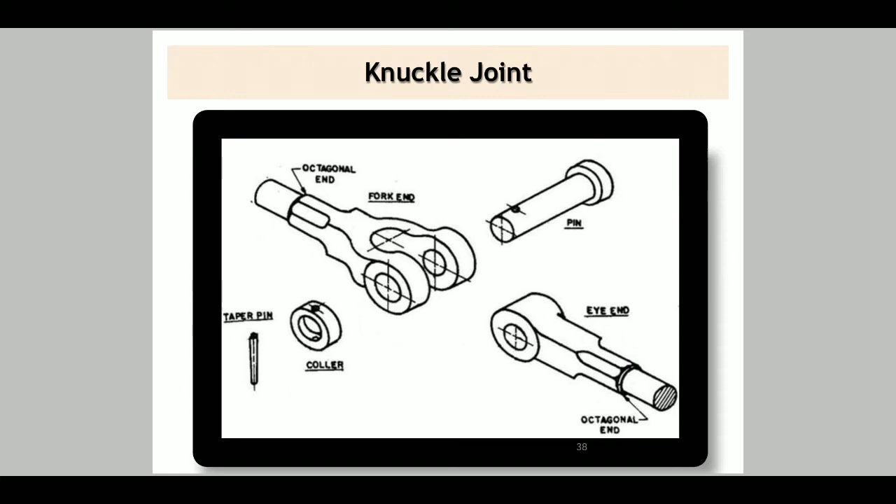The basic components of knuckle joint are: first is eye, next fork, and third is the knuckle pin. Here you can see the three parts: eye, fork and the knuckle pin. The eye: the end of one rod is formed into an eye or single eye.

Next is fork. The other rod is formed into a fork or double eye with an eye in each of the fork. The single eye is inserted into the fork, and after aligning the holes, the knuckle pin is inserted through them. Knuckle pin has a head at one end, and at the other end it is secured by a collar and a taper pin or split pin.

In this diagram, P is the tensile force applied on the side of the knuckle joint. The material for knuckle joint is usually plain carbon steel or wrought iron. It may be cast or fabricated or forged.

Now we will see the design part of the knuckle joint. Before that, we will see some of the basic terminology in the knuckle joint. So here P is the axial tensile force on rods, as we have seen in the figure. Small d is the diameter of the rod. t is the thickness of the single eye. Capital D is the outside diameter of the eye. dp is diameter of the knuckle pin as shown at the bottom of the figure.

t1 is the thickness of the fork, while dh is the diameter of pin head at the top of the fork. You can see it. And finally, t2 is thickness of pin head and collar.

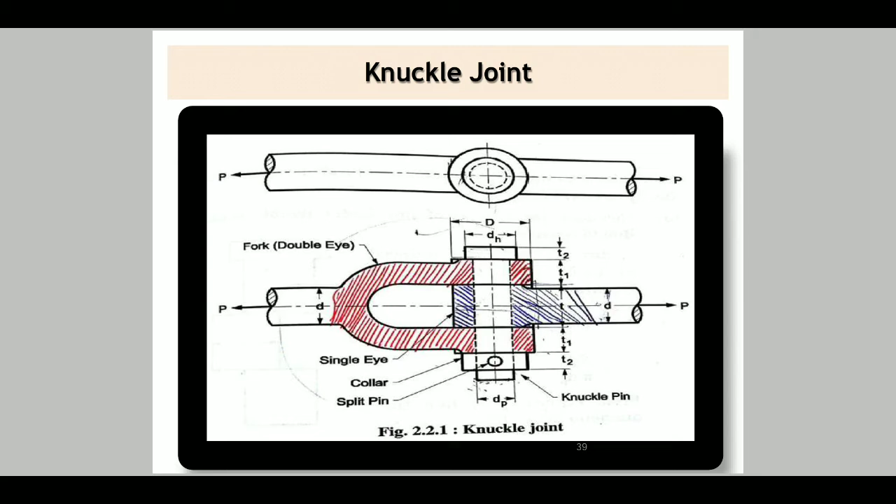So moving ahead with the design procedure of knuckle joint. First we will find out the parameters to be calculated, that is, first is diameter of rod d. The stresses induced on the knuckle joint are sigma t, that is tensile stress, sigma c is compressive stress, and tau is the shear stress. These are the stresses induced on the knuckle joint.

So for the diameter of rod d, we need to calculate according to the formula sigma t, that is tensile stress, equal to P, that is axial force, divided by pi by 4 d square. So d is the diameter of rod here. Using these equations, we can find the unknown diameter of rod d.

The second part is diameter of knuckle pin, that is dp. So as shown in the figure, diameter of knuckle pin dp can be found out using the equation of direct shear stress, that is tau equal to P, that is axial tensile force, upon 2 into pi by 4 dp square, where dp is diameter of knuckle pin, can be found out using these equations.

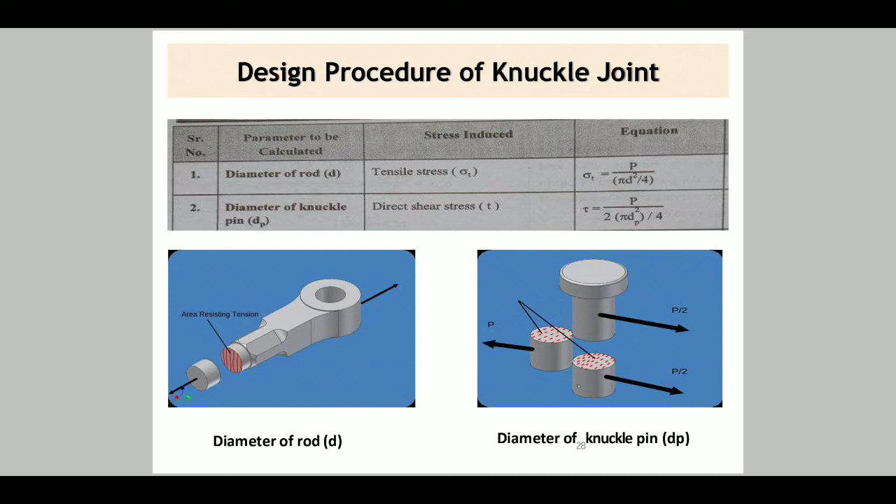Another way to find the thickness of single eye is by proportion. So using the empirical relation, that is t equal to 1.25 d, we can also find out the thickness of single eye t, where d is the diameter of the rod in mm. So using both these equations we can find out t, and t is taken as the larger of the two values.

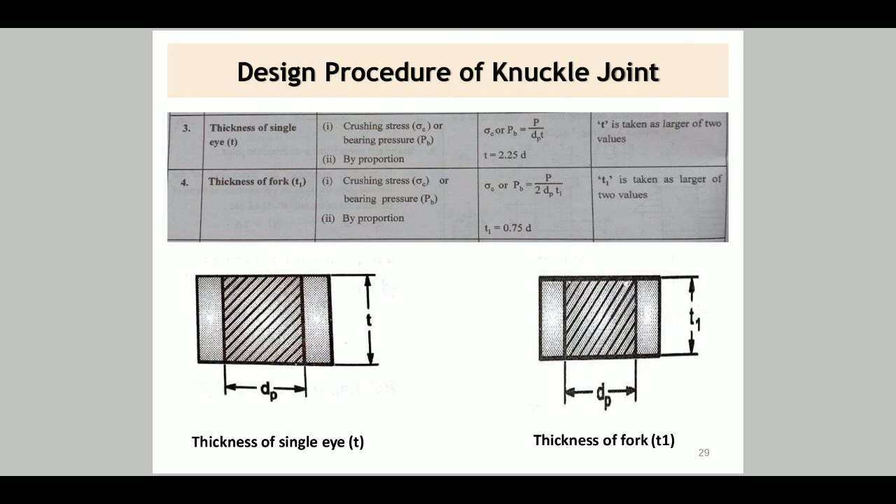Next in the design procedure of knuckle joint is the fifth parameter, outside diameter of eye, capital D. The stresses induced on the outside diameter of eye are tensile stress sigma t and direct shear stress tau. So using the tensile stress equation, sigma t equal to P upon D, that is outside diameter of eye, minus dp, that is diameter of knuckle pin, into t, that is thickness of the single eye. Here we can find out capital D, outside diameter of eye.

According to the direct shear stress equation, we can also find out capital D, that is tau equal to P upon D minus dp into t. So using these two equations we will find out the outside diameter of eye D, and we will take the larger value between these two for the calculation.

The next part is stresses in the fork. The two stresses are tensile stress sigma t and shear stress tau. So sigma t equal to P upon 2 into D minus dp into t1. Here t1 is the thickness of the fork, and next is shear stress tau equal to P upon 2 into D minus dp into t1. So for safety we will take sigma t less than sigma allowable, and tau shear stress less than tau allowable.